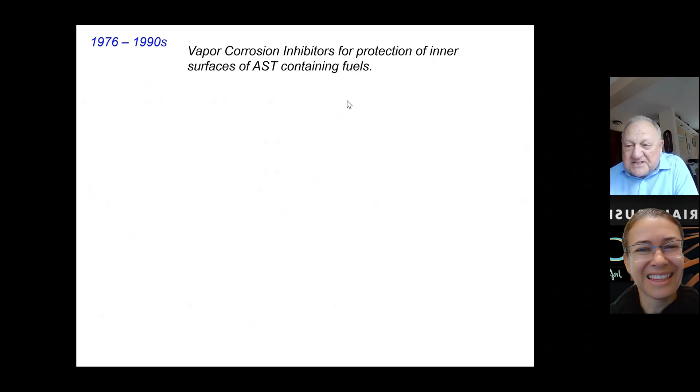As you see, I worked in corrosion, protection from corrosion, paints, and so on during 47 years. The first 16 years were very important and very interesting for me, and I dived into this role. One of them, I'd like to show you, is our vapor corrosion inhibitors that I researched for protection of inner surfaces of above ground storage tanks containing fuels.

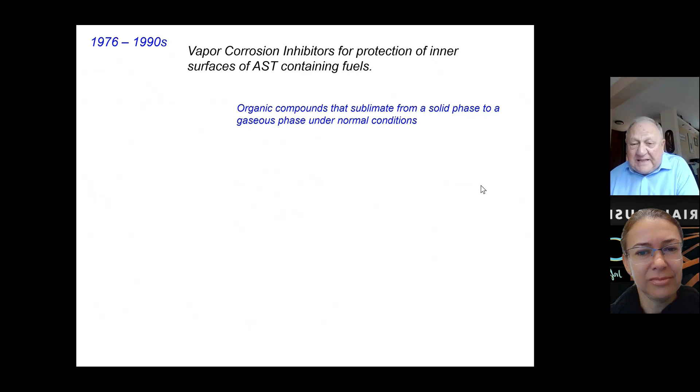And these corrosion inhibitors are organic compounds that can sublimate from a solid phase to a gaseous phase under normal conditions. I received very strong physical-chemical education, and I knew well thermodynamics, kinetics, surface chemistry, physical organic and organic chemistry. And I learned that people came to study and research corrosion and materials from different disciplines, mostly metallurgists, material science, but at that time, in the 1970s, I came as

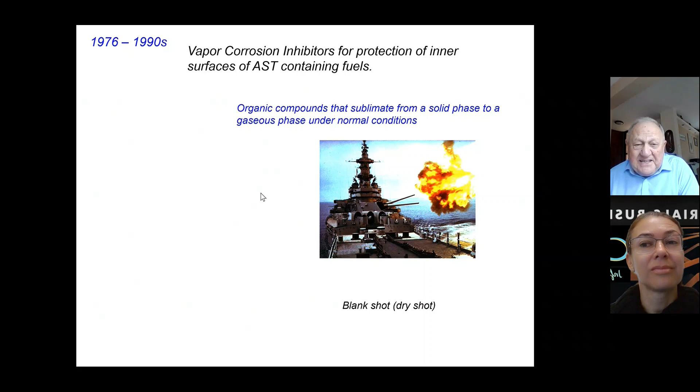a chemical engineer, and I studied the history that the first vapor corrosion inhibitors were invented by American Jewish chemist Aaron Wachter in 1943 from the company Shell for the US Navy, because the US Navy had many cannons, and the first shot was a blank shot, a dry shot, and of course the enemy could detect this ship. Therefore, inner surfaces should be protected in some way.

And Aaron Wachter detected dicyclohexylamine nitrite, and we detected that these vapor corrosion inhibitors could be used for protection of the inner side of above ground storage tanks. And we used many of these this way to protect the inner side of above ground storage tanks

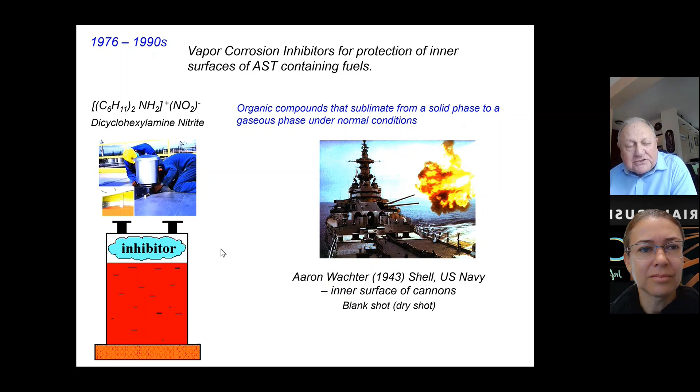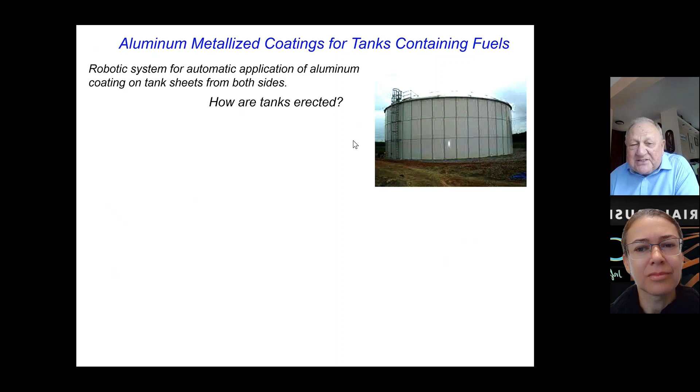above fuels. Then we researched also, only two examples I'd like to show you, aluminum metallized coatings for tanks containing fuels. And we invented, together with one institute in Moscow, a robotic system for automatic application of aluminum coating on tank sheets from both sides. How are tanks erected? You know, these are sheets that were welded.

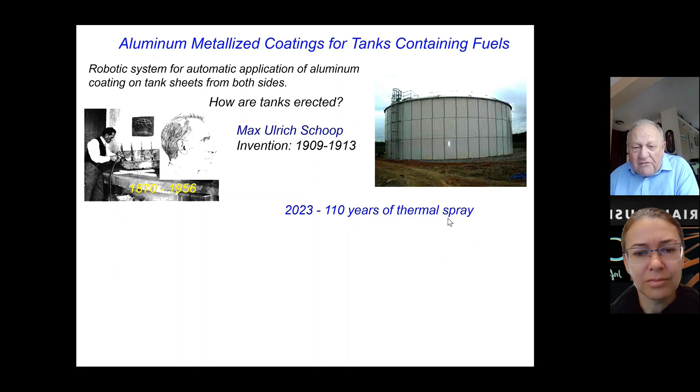And I investigated the history of aluminum metallized coatings. And the first was Max Ulrich Schoop, engineer from Zurich, Switzerland. And his invention in the beginning of the 20th century was very interesting. This year, we celebrate 110 years of thermal spray, and this invention was based on his observation of his children shooting with flobert guns in the garden, where the lead bullets formed splats on hitting the wall.

And I wrote about this in my first book, Corrosion for Everybody. Another legend is that Max Ulrich Schoop was a hunter, and in hunting he also saw how these lead bullets form splats when hitting the tree. We investigated porosity, adhesion, bending, content of aluminum oxide in coating, and accelerated tests.

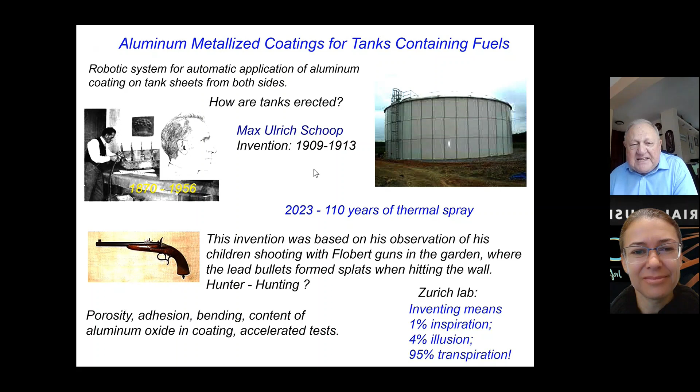But what is interesting, in his Zurich lab and workshop, it was written: inventing means 1% inspiration, 4% illusion, and 95% transpiration. This is very important for our young generation, students, scientists, and engineers. I appreciate this engineering shop, and this process sometimes is called shopization. I behaved as a child with a toy.

Do you know what is the difference between the behavior of a child and an adult? No. Yes. Swiss psychiatrist Carl Gustav Jung defined that children dismantle the toy world into all small things. And this is exactly what I did in my laboratory. This was the first corrosion laboratory in Astrakhan, in the oil and gas fuel industry. The adults search the relationships between different parts. This is exactly what I do now.

And I repatriated to Israel in 1990, 33 years ago, and I began in Oil Refineries Limited company. Earlier I was working in the Central Research and Development Laboratory in Astrakhan. I visited nearly all tank farms and gas stations in all 15 republics of the former USSR. And this gave me wonderful experience during 16 years living in the former USSR.

In Haifa and Ashdod, we had 2 refineries in Israel, and I began working for research and development in the oil refining industry, and created a corrosion and materials laboratory. Then in parallel, I dealt with education, teaching in Technion, the Israeli Institute of Technology, different universities in Tel Aviv, and engineering colleges in Israel. And what is interesting, we created immediately in 1992 the Israeli Corrosion Forum that is very active up to now. I was very active in disseminating knowledge about corrosion and participated in European and NACE, now AMPP, conferences.

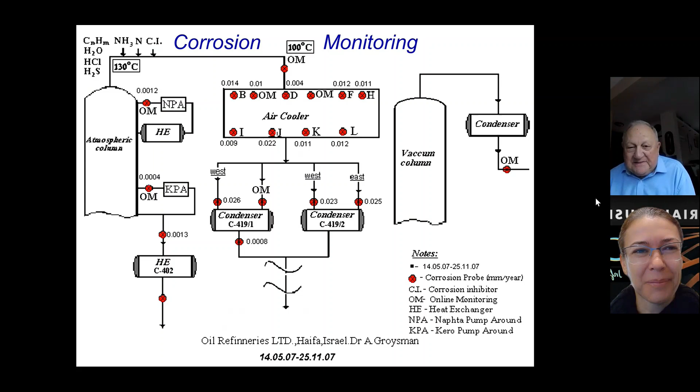Yes, no problem. Yes, with my pleasure. So let's move into the next question, yes, perhaps.

What's the motivation? I know you have so many books published in different languages and different approaches. What's the motivation for books in different languages, so we can reach other people?

Yeah, it's very interesting. My mother was a teacher of mathematics, my wife is a teacher in chemistry. Therefore I live all the time with teachers, but I didn't like teaching. Yes, but at some stage, after 20 years of working in the industry, I felt that I know much.

And I also, as an adult, began to connect, intersect, interact with different subjects, different disciplines. And I thought about how to deliver the corrosion subject in an attractive form. So I began looking for ways to connect corrosion with art, with history, music, with love, with humor, with philosophy, and even with sex.

I have different lectures with all these connections, and I deliver them at Eurocorr conferences. For example, corrosion in art in London, corrosion in history in Italy, corrosion in music in Scotland, corrosion in love in France, of course in Nice. Corrosion and humor in Montpellier, France; corrosion and philosophy in Moscow; corrosion and sex - where? Of course in Germany. I delivered these in different universities and colleges in three languages: English, Hebrew, and Russian.

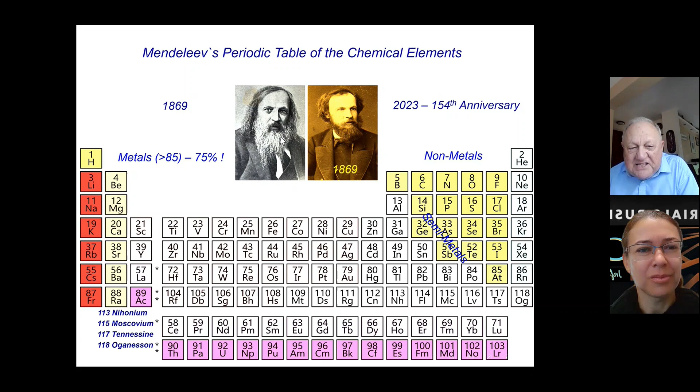This is young Mendeleev, Dmitry Ivanovich. All people think this picture is when he revealed this law, but no - he was young here, only 35. This picture is from 1907, when he passed away. This is his real picture.

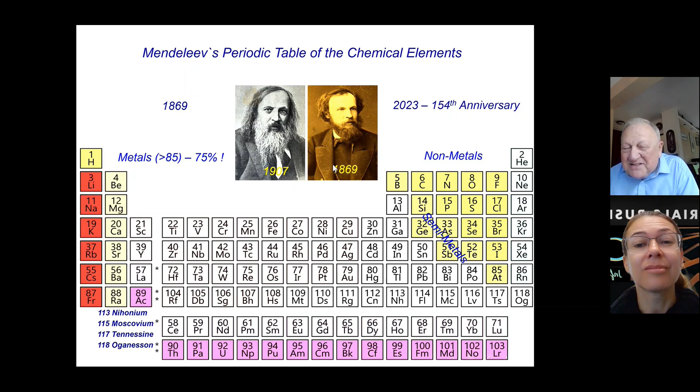Now I'd like to show you about prediction of metal corrosion. We have several minutes to show you thermodynamics and kinetics - people come to corrosion and materials from different disciplines. Because I am originally a chemical engineer, I have a strong background in chemistry - inorganic, organic, physical chemistry, surface chemistry, and chemical thermodynamics, which studies the spontaneity of chemical reactions.

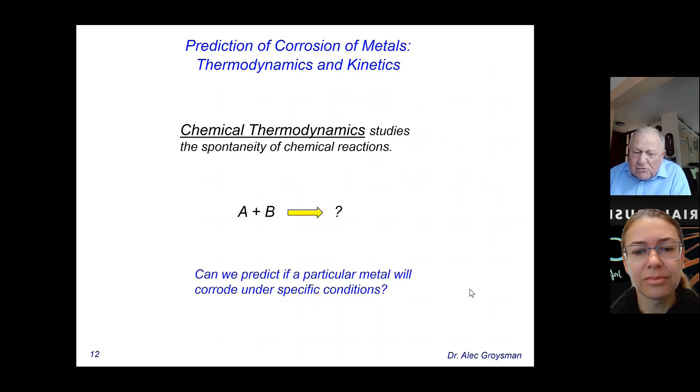We'd like to know if a metal in a given media, water or oxygen, will react. Can we predict if a particular metal will corrode under specific conditions? Thermodynamics gives us this response. This is the reactants, and we enter the realm of thermodynamics with reaction products. Josiah Willard Gibbs was the first who suggested this formula to detect if delta G - the difference between changes of Gibbs energy of different chemical substances, of products and reactants - if these changes are more than zero, the reaction will not occur.

If it equals zero, this is equilibrium. If less than zero, the reaction may occur. This applies also for corrosion - think of it as a traffic light. On red you may not go. On yellow you should wait for the light to change. On green, you should go.

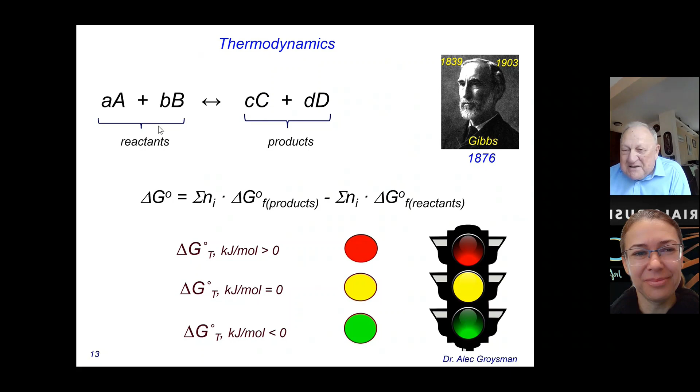What's interesting is this is similar to when a guy comes to a girl and says, I love you. Oh, I love you too - this reaction, this love, can occur. If he says I don't love you, and she answers I love you, but he says I don't love you - now the reaction in love between them cannot occur. But when he comes and says I love you, and she doesn't know what to do, he can change the temperature - give her flowers, talk to her friends, invite her to a restaurant, and so on. We can change the temperature of the reaction, the concentration of reactants and products, to change the outcome of this reaction.

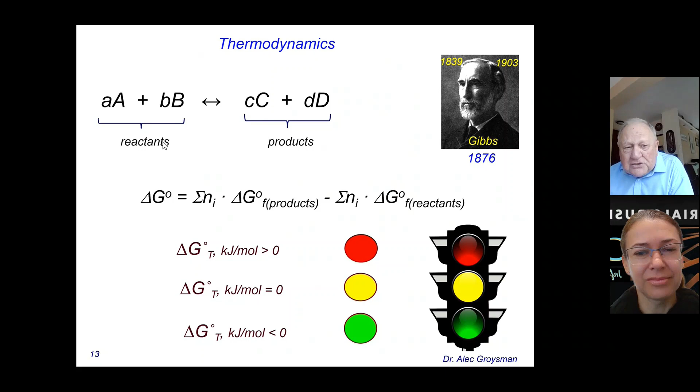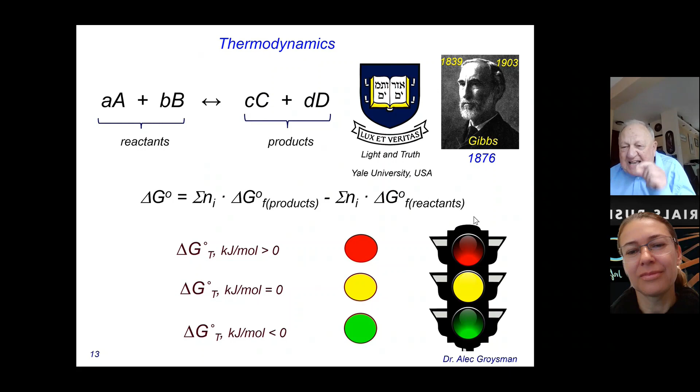This is Yale University where Gibbs worked. I love him - no, after my wife. It's very interesting - this is the only university in the world where you may read, in Hebrew, Urim VeTumim, Lux et Veritas, light and truth. This is exactly what we should remember.

In my book I give several examples predicting corrosion of metals: iron with water can react, while gold with water and copper with water cannot react. But copper with water and oxygen can react. This is very important - you see, delta G is negative.

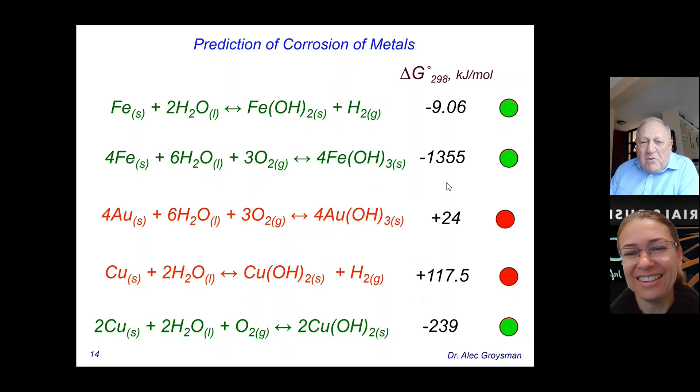Where is the corrosion rate bigger? Okay, now my reply.

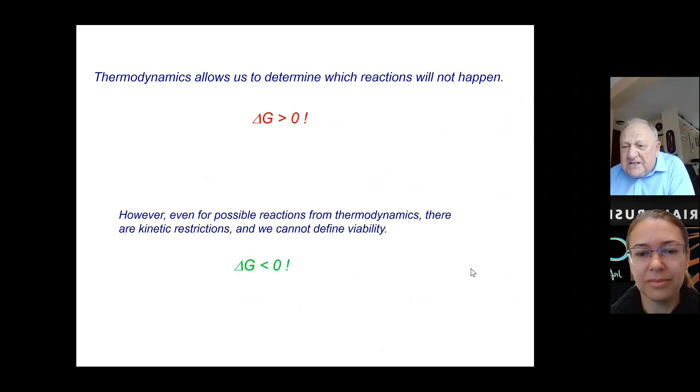Thermodynamics allows us to determine which reaction will not happen, only that. However, even for a possible reaction from thermodynamics, there are kinetic restrictions, and we cannot define viability. Even when aluminum, titanium, magnesium have delta G changes of Gibbs energy lower, they cannot react because of kinetic restrictions, formation of stable, metastable layers.

Now, since we have little time, I'd like to show you that when we talk about corrosion phenomena, these are stochastic, chaotic processes. When the energy of the system goes against the direction of the reaction, we may see this is a stable condition. This is metastable, or passive - you see, this is non-stable. Even changes of temperature, concentration, pressure can change this. Chlorides and other anions can change this situation too.

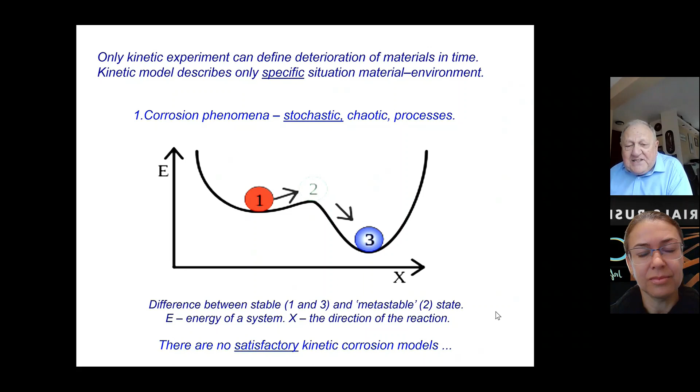And usually there are no satisfactory kinetic corrosion models, and I'd like to talk a little bit later about this. Fantastic.

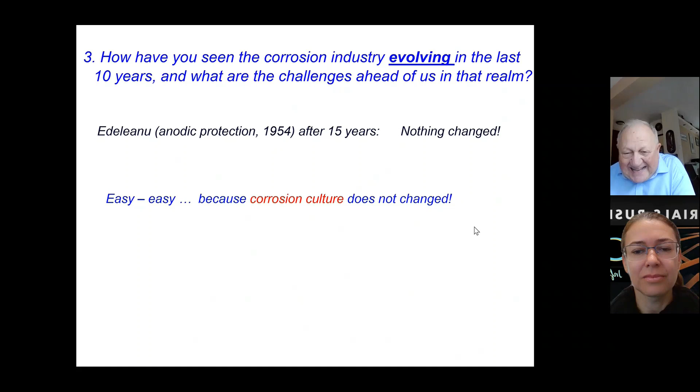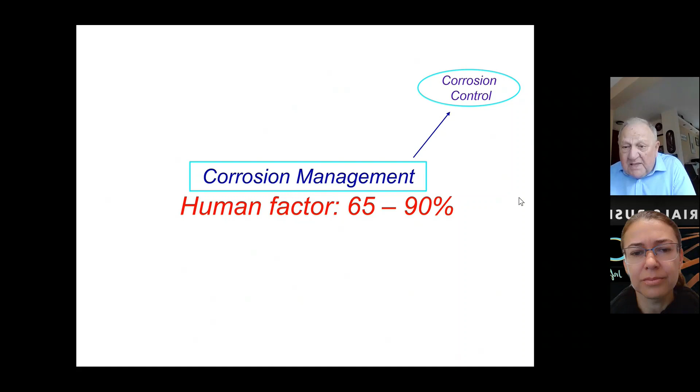But corrosion management was developed. Yes, the corrosion industry is not keeping up with corrosion science. I'd like to show only the development of corrosion management: planning actions in corrosion control, corrosion monitoring, knowledge transfer, education, study of each accident, communication, publication of minutes, regular inspection, maintenance, element of change, and of course foreseeability with different documentation and standards.

I will define that the human factor is responsible, for all this corrosion management, 65 to 90% for all corrosion cases, for all corrosion failures - human factor.

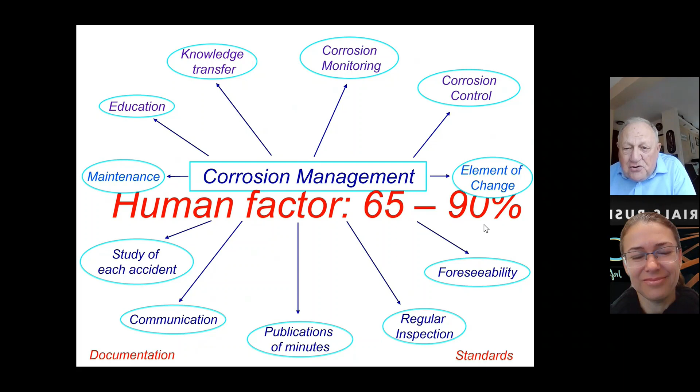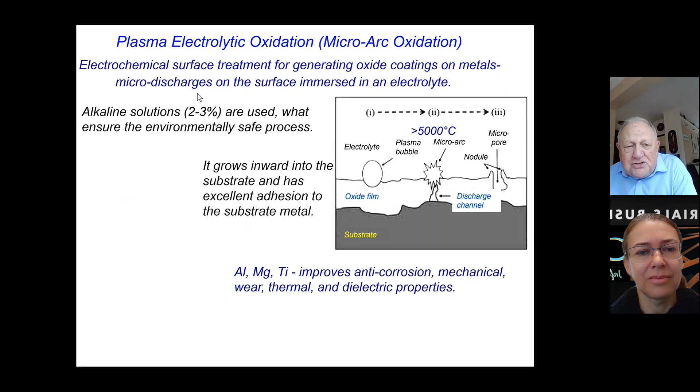What is interesting, for example, several examples I'd like to show about the evolving plasma electrolytic oxidation, or micro-arc oxidation - this is electrochemical surface treatment generating oxide coatings on metals, micro discharges on the surface immersed in electrolyte on aluminum, magnesium, titanium.

And in Israel, we may see how this plasma electrolytic oxidation is used for creating, for producing different coatings on aluminum heat exchangers for a desalination plant.

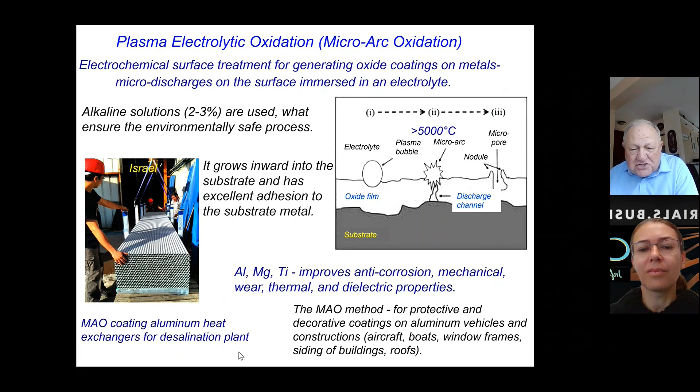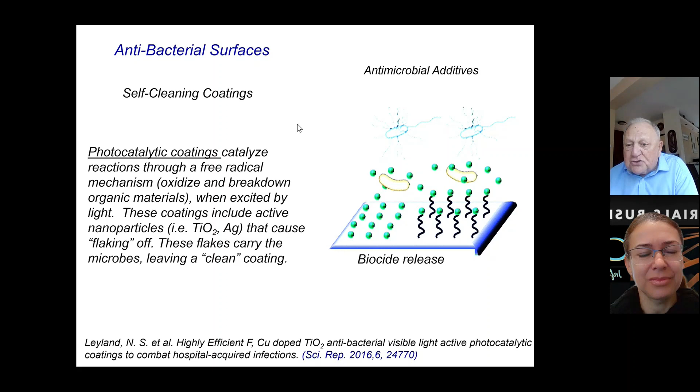Sharks are resistant to fouling organisms in the water, including algae and barnacles. And now engineers and scientists can create such coatings for protection and mitigation of corrosion in different environments.

About challenges, I can say that I don't like to give different predictions. The history of science and technology shows that development was unpredictable. One of the famous historians, an Israeli historian who lives in Jerusalem, Yuval Noah Harari, wrote three books.

One of them, A Brief History of Tomorrow. He wrote this book in two languages, and I read it twice, in Hebrew and in English. He wrote that humans now, like Homo Deus, can do everything. And he wrote also that we had finished with big wars. And 3 years ago, we saw big wars begin in the center of Europe. I phoned him and said, your prediction failed. Therefore, yes, I don't like predictions.

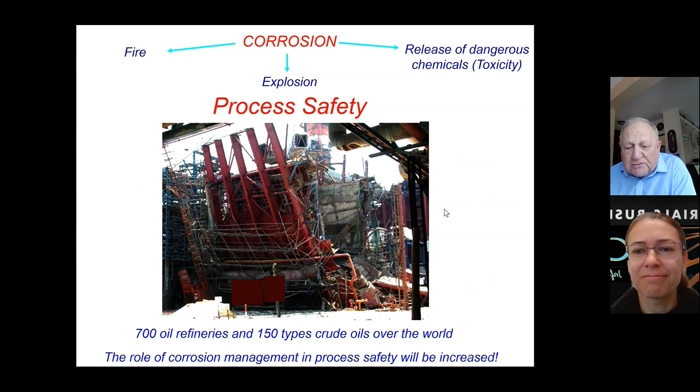For example, in the refining industry, we have 700 oil refineries and 150 types of crude oils over the world. The role of corrosion management in process safety will increase if we begin dealing with these. People who work in process safety do not know corrosion. People who work in corrosion do not know process safety well. But as you see, corrosion results in fires, explosions, release of dangerous and toxic chemicals, and process safety is a discipline that deals with the prevention of all these problems. Therefore, the connection and interaction between corrosion and process safety should be increased.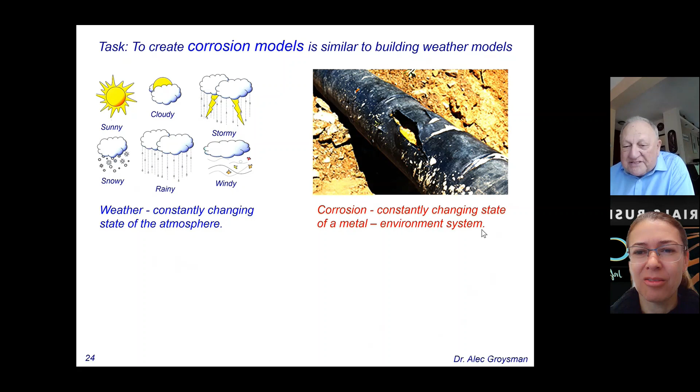What about the creation of corrosion models? It's very interesting that creating corrosion models is similar to building weather models. You know that weather is a constantly changing state of the atmosphere, and corrosion is a constantly changing state of a metal-environment system. Therefore, I say the specialists will continue building predictive models of general and localized corrosion, but without success. This is like predicting the duration of human life. Can anybody predict how long each person will live?

No. Before our interview and meeting, I asked several big companies, such as Honeywell, BP, and others, about their models. They have prediction models, but they work only for their very, very narrow purposes. And I think the prediction of corrosion behavior is like prediction of the stock exchange or history. There is no prediction in history. The past cannot be the basis for the prediction of the future.

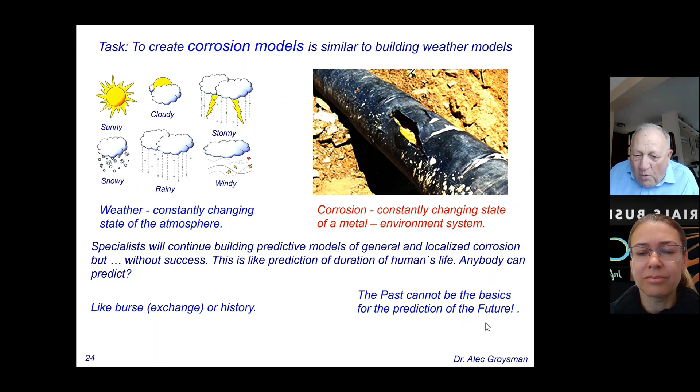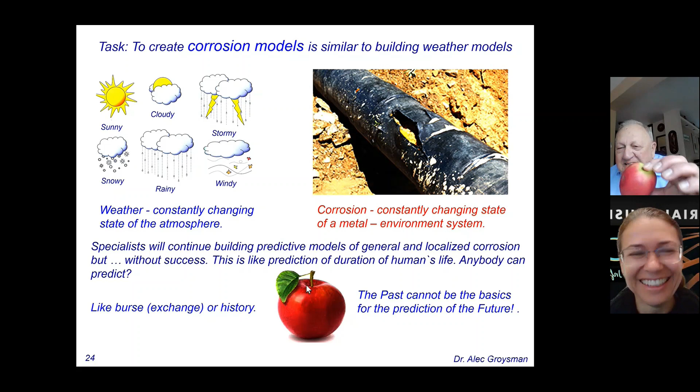This is exactly it. Monica, what do you see here? An apple. No, this is wrong. You see the image of an apple. This is an apple, for sure. You cannot eat this. I can eat. Yeah. Okay? This is the same as prediction. Therefore, for sure, a degree of uncertainty will remain. Okay? Of course.

Yeah, that really is amazing. Every single point that you touched is exactly what I have been preaching for 20 years. So we need to make better decisions. We need to manage better. We have the tools, we have the experts, we have the technology. We need to integrate those systems for this to work in a better way.

So it is really enlightening, and I am really happy that, like you said, we think alike, and I am very grateful when I find people that share my passion, because every single one of the incidents and accidents caused by corrosion, if we learn to manage it better, we can prevent. Absolutely. Okay. Yeah, for sure.

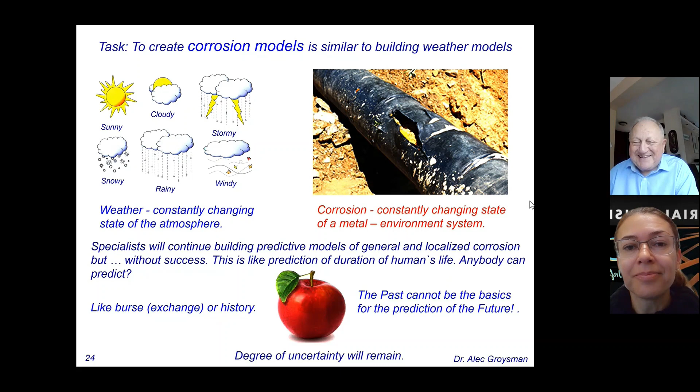All right, so let's go to the next question then. If you go to the next slide, what do you think we have to do as professionals to extend the ladder to the next generations? How can we help new guys and gals coming into this realm of corrosion discover the beauty that is in it all? I like this question. Yes, all your questions, once again, I appreciate, because I think in the same manner.

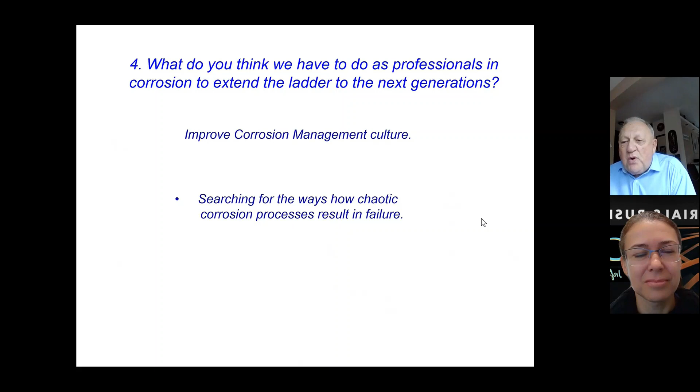First, improve corrosion management culture. Improve, yes, and this is a very large aspect. Searching for the ways in which the chaotic corrosion process results in failure. For this we should attract mathematicians. Without mathematicians, we will not be able to evolve new models.

Then we should change the relationship of society to corrosion, exactly as we changed the relationship of society to health, to happiness, to protection of the environment. We solve old corrosion problems with known materials and media. New materials and new hostile media appear as a result of the development of new technologies.

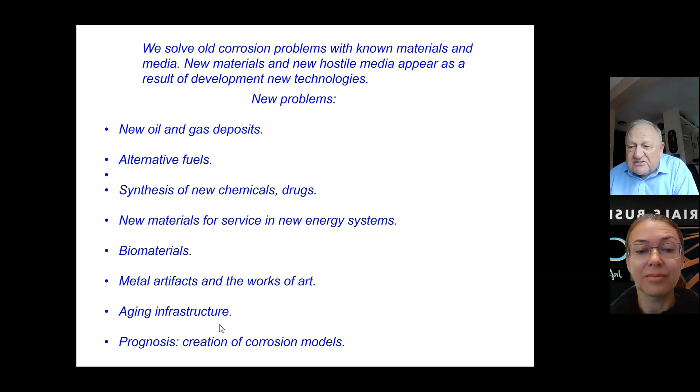Here are some new problems: new oil and gas deposits, alternative fuels and biofuels among them, synthesis of new chemicals and drugs, new materials for servicing new energy systems, biomaterials, metal artifacts and works of art, aging infrastructure, prognosis, and creation of corrosion models. These problems are very important for us, for the new generation. We build this ladder.

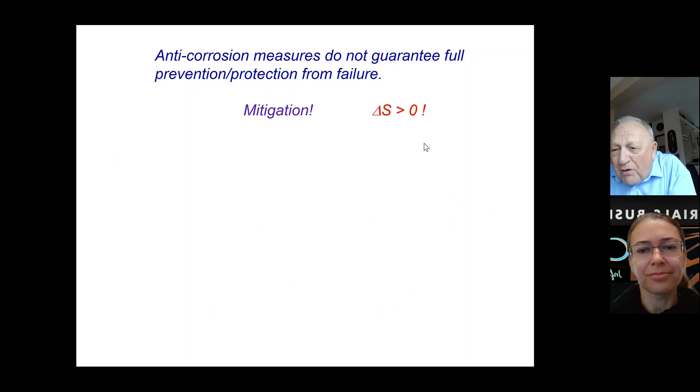Anti-corrosion measures do not guarantee full prevention, mitigation, or protection from failure. Why? Because of the second law of thermodynamics: the entropy of the universe increases all the time. As the former president of France, Georges Pompidou, said, we do not solve problems, we live with problems. Okay, I love it. And now I'd like to show you that my investigation showed that corrosion events occur every 2-3 days. Yes, every two.

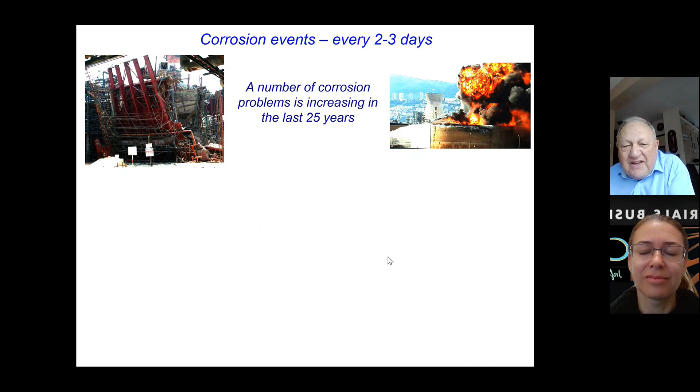These are my pictures. The number of corrosion problems has been increasing in the last 25 years. Why? Because of the introduction of new processes. We see this in all industries, especially in oil, gas, refining, petrochemical and chemical industries. For example, now we organize this corrosion section in the 15th Mediterranean exhibition and Congress at the end of May in Barcelona, for all countries of the Mediterranean Sea.

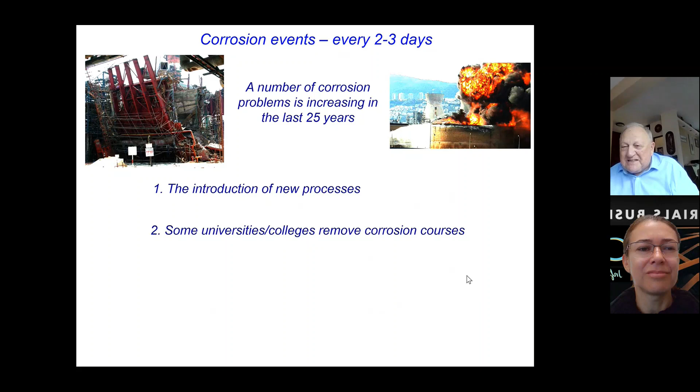Some universities and colleges remove corrosion courses. Several years ago, Materials Performance Journal published the list of all universities and colleges where corrosion courses were. I made this check. I wrote to all these universities during the last 10 years about corrosion courses. I think about 50% remain. Now, corrosion engineers were replaced with consultants, and the last corrosion specialists retire and are not replaced. I know well all my colleagues who retired; there is no knowledge transfer.

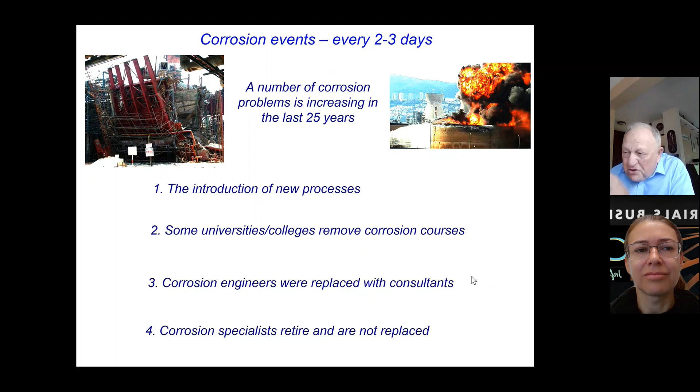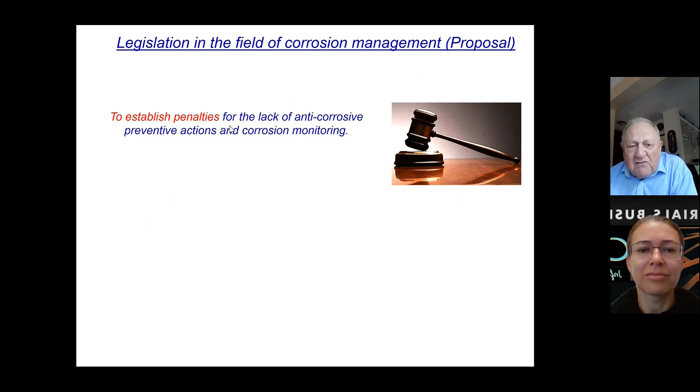What is important? To create legislation in the field of corrosion management. This is my proposal that I make at every conference: to establish penalties for the lack of anti-corrosive preventive actions and corrosion monitoring. And of course, education and knowledge transfer. 75% of all corrosion failures happen because of insufficient information, communication, interaction, and knowledge. It is important to transfer tacit knowledge.

What is tacit? You can read all encyclopedias and books, but in our heads there is knowledge that we have only in our heads. And it is difficult to put this knowledge down, and experienced specialists should give this knowledge. I call this basic knowledge. Next, to organize teaching of educators. Unfortunately, I know many educators who do not know how to teach. They do not even know what they know and what they do not know.

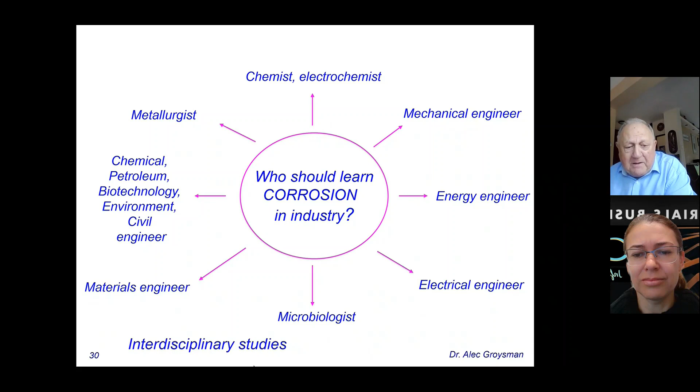And last, but not least, I'd like to show you who should learn corrosion in industry: chemists, electrochemists, mechanical engineers, metallurgists, energy engineers, chemical, petroleum, biotechnology, environmental, civil engineers, materials engineers, microbiologists, electrical engineers, and of course, it's important to teach managers. Several times I pushed managers, and interdisciplinary studies.

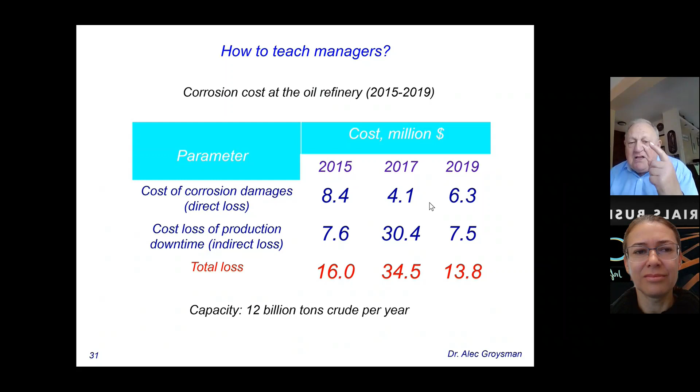How to teach managers? I organized this at our refinery company. Each year I showed what the corrosion cost is at the oil refinery, the corrosion losses, direct and indirect. For example, for one year it was 35 million. 35 million for one refinery. This is a big refinery with a capacity of 12 billion tons of crude per year. Each person on the refinery staff lost this money.

Then, improve corrosion education in industry. Give pedagogical skills to scientists and engineers to be educators. My personal experience and vision: creation of blocks of textbooks in curricula for categories of workforce at different industries, as we create Lego. We create 5 categories: educators and teachers; students at schools, colleges, universities; young engineers and scientists with less than 5 years of experience; experienced engineers and scientists with more than 5 years, who every several years should be trained, as teachers and doctors are; and of course, managers of different levels.

This is very important. Corrosion basics should be obligatory. This is a very important point for all industries. Thank you.

Alec, it is so incredible because everything that you said makes absolute sense. I have been saying this for so many years. One of the things that always stands out is how we lack the connection between the norms and the countries or the laws. We do what is mandated, because we go the easiest way. If we don't have to do it, likely we won't do it.

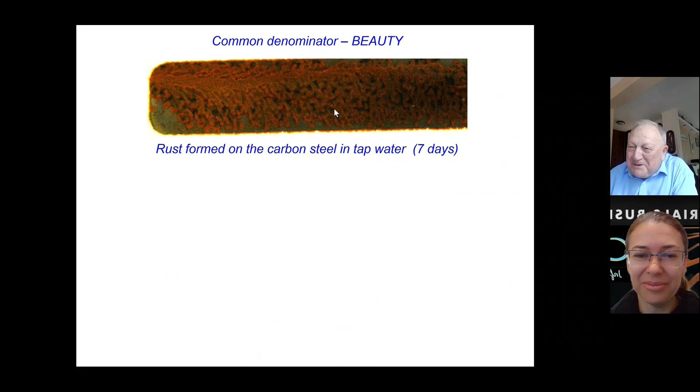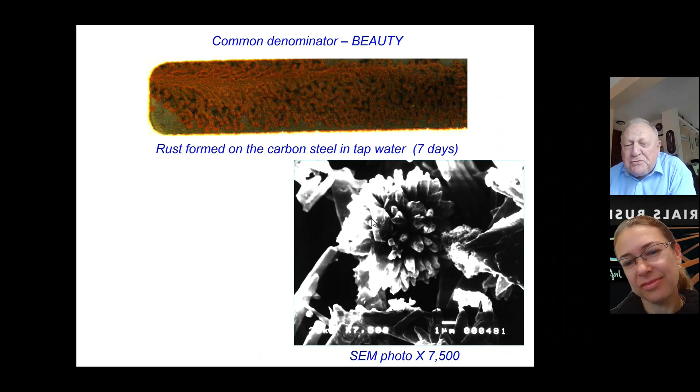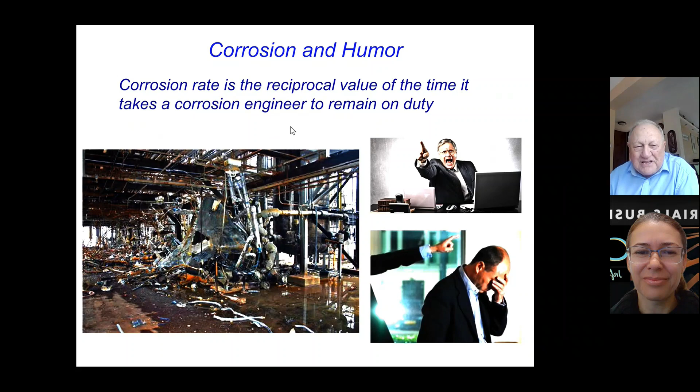And several aspects I'd like to show you about corrosion and humor. Humor is very important in our life. The definition of corrosion rate is the reciprocal value of the time it takes a corrosion engineer to remain on duty.

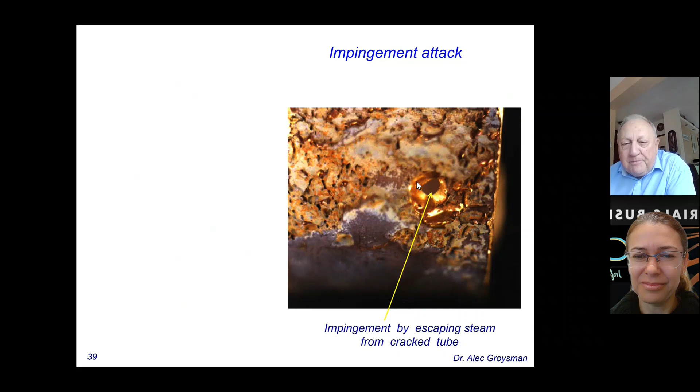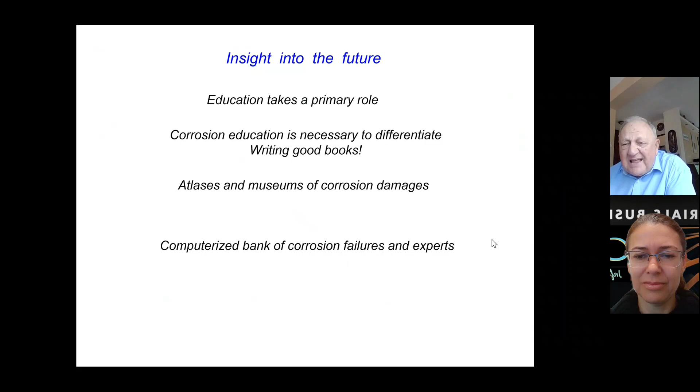And in insight into the future, education takes a primary role in corrosion. Education is necessary, together with writing good books in different languages, atlases and museums for corrosion damages, the creation of a computerized bank of corrosion failures and experts, and plant standards in the field of anti-corrosion protection and corrosion monitoring. These should be created in each plant in each industry.

Yes, he was also a chemist. Yes, but we know him as a composer, and he created the opera Prince Igor. I'd like to show, by means of his music, the Polovtsian Dances, how we can describe uniform general corrosion.

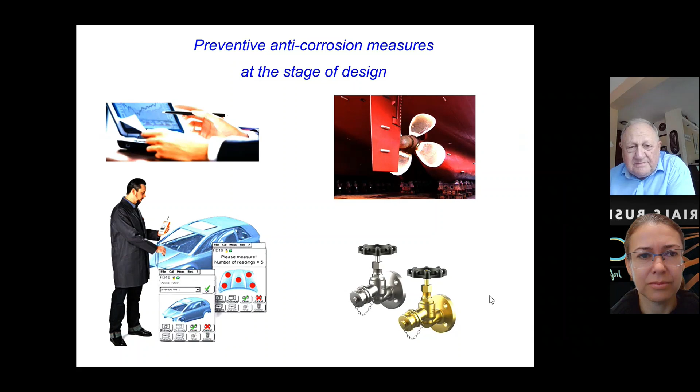You may see new metallic equipment and structures: ships with good paintings, decks, bridges, different tube pipelines. They are well protected from the environment. Preventive anti-corrosion measures at the stage of design are carried out well. Different sacrificial anodes from zinc are applied for ships, and good paintings are carried out for cars and valves and so on. Effective coatings and cathodic protection were used offshore.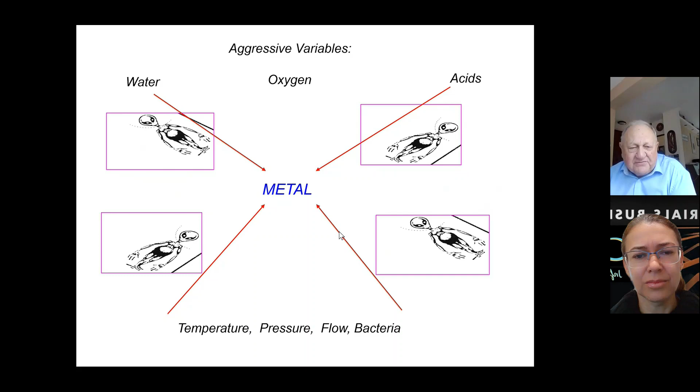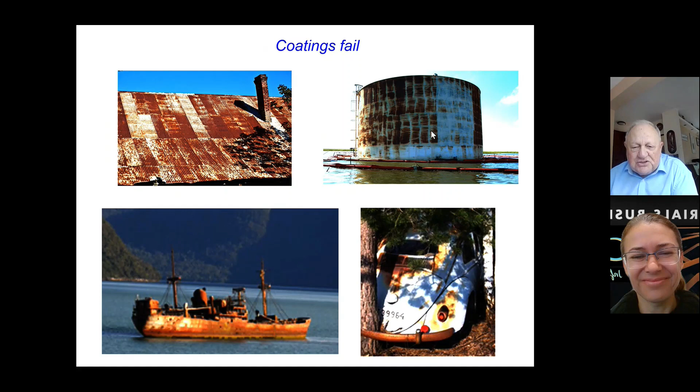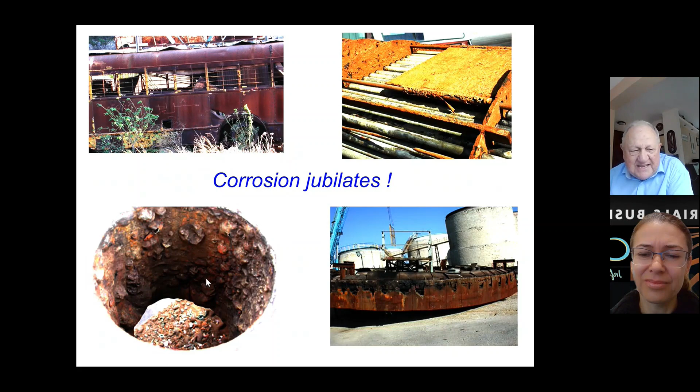But aggressive variables exist in the environment: oxygen, water, acids, temperature, pressure, flow, bacteria, and metal is not indifferent, not apathetic, not inert and inactive. Metal begins to react with them. Coatings fail. You see, this is rusty: roof, storage tank, box, ships, general and localized corrosion. And corrosion of tubes. Heat exchangers fail. This is the bottom of an aboveground storage tank. Heat exchangers because of biological corrosion.

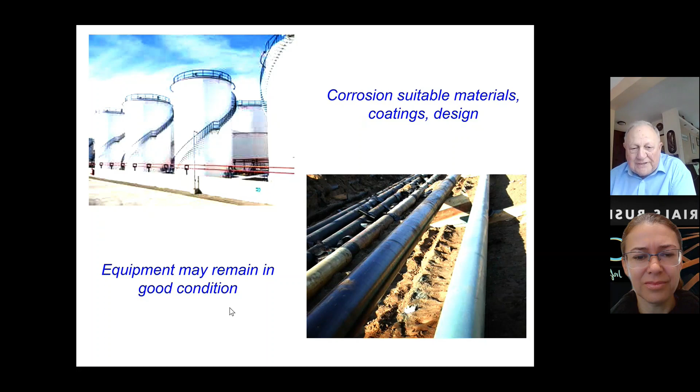But if corrosion control, suitable material, and design are carried out well at the stage of design, equipment may remain in good condition. Go ahead, knowledgeable specialists and corrosionists among them. Therefore, I trust in rust. Thank you, Monica.

Alec, thank you very much. It was wonderful having you in our podcast. To our listeners, keep on listening. I'm sure we'll have a lot more to chat about with Alec. It is absolutely interesting. He has a wealth of knowledge, and I am very grateful that you came into the podcast and are sharing your thoughts, investigations and results. And like I said before, we really think the same way. We need to improve management practices, and that will help us really go where we need to go in this realm. So thank you very much.